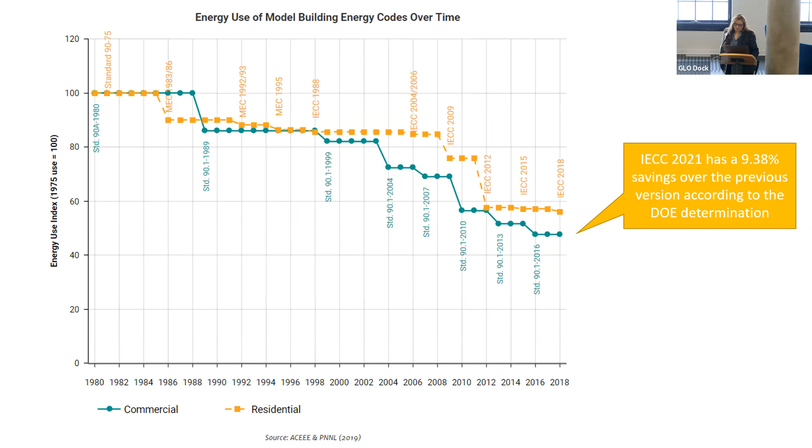Now, ICC, which writes the IECC for both residential and commercial, has published their mission in a document called Leading the Way to Energy Efficiency. And they are looking at developing what they call glide paths to achieve zero energy buildings by 2030. And the way they work this out in their code,

Is it? I can't see what people are seeing, so. Yeah, as long as everybody can see the slides, I'll work with it. I don't have too much that involves pointers, so.

Zero energy by 2030. And the way they do that is they have a base code and then they have appendices that localities can adopt that have higher energy efficiency. They're more stringent than the base code, and we got the first one that was aimed at getting buildings to net zero as an appendix in the 2021 code. And it's not perfect, and we've got some proposals to change it,

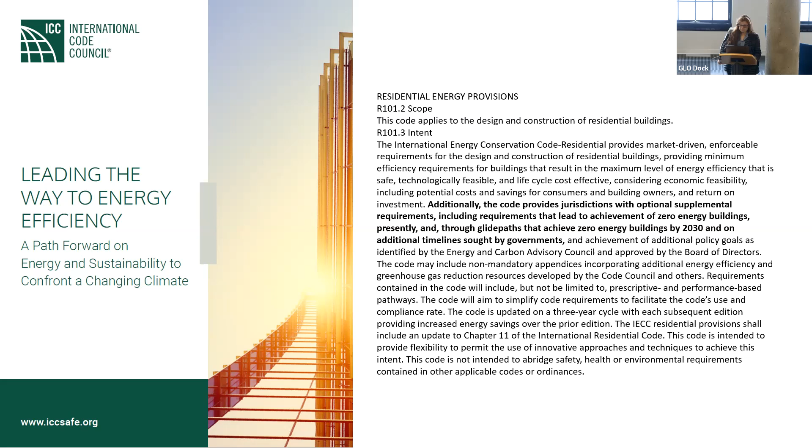but the idea is they're trying to put this minimum code in that they can get agreed upon across the industry and get industry consensus on, which is very difficult. And then they have these additional proposals that overlay on it and fit well with it, and that's why they're written in that appendix form, but they're optional for adoption. So it can be a little complicated, but they are there.

So I'm going to move to what ASHRAE did, and I was chairing the committee through a large part of this development with the 90.2. And as I said, the 2007 version of 90.2 was little used. I think it had 1 or 2 adoptions, but it wasn't really used. I don't think it was even almost at the minimum code level. It had basically been ignored for several years.

And we got to the point where we had to figure out what was the purpose of having it there, because it wasn't being adopted. You had the IECC, that was the federal minimum for residential. What should we do with this? And so ASHRAE actually commissioned a standards advisory panel to look at what we would propose to do. And they put out a report within ASHRAE, but it's public, in November of 2011.

And this gives you an idea of the timeline it takes to develop one of these things. We're working on a passive building standard now, working on higher performance things, and we need to work on them now. We're only 8 years away from 2030, and we are not ready as an industry. ASHRAE is doing a great job from their part, but the industry isn't ready. And so the recommendations of that panel report are written in this paragraph.

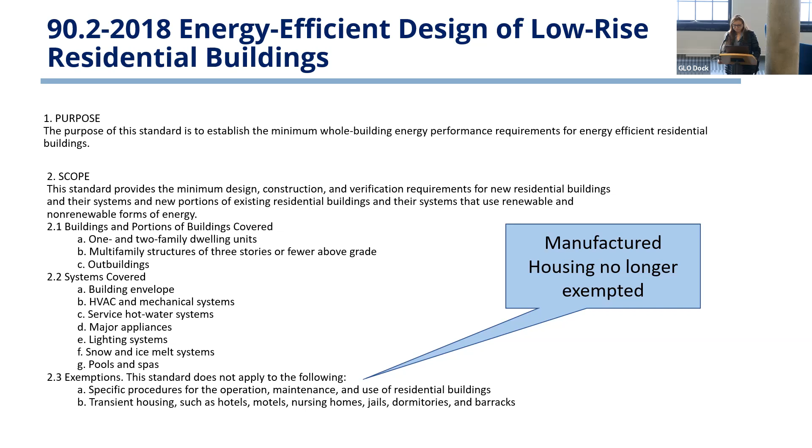Okay, so getting to what's in the meat of the standard. Basically, it's a performance standard. It's based on an ERI pathway, Energy Rating Index pathway, which is very similar to a HERS rating index pathway. There's an ERI path starting in the 2015 code. It does do a version of an energy rating pathway. There are some prescriptive backstops and requirements overlaid on that ERI pathway, but these are only basically to guide that, when you have an energy rating index pathway and you just have one number, there are trade-offs you can make, and we want to guide people into making smart trade-offs. And that's what those are in there.

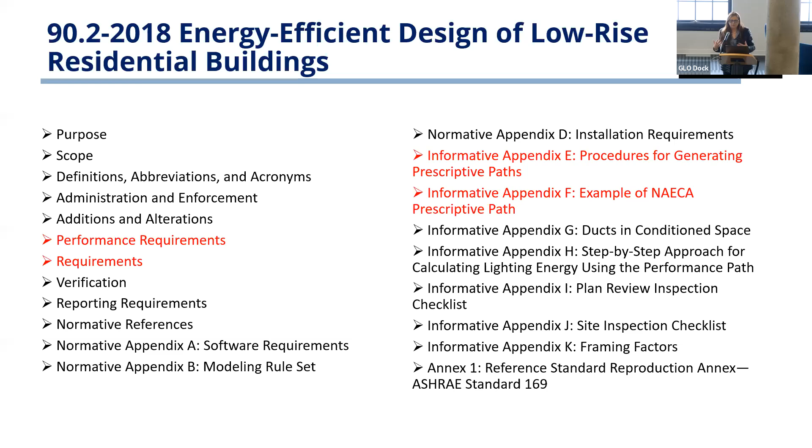So specifically, it does have numbers that are at a level that are 50% more than the 2006 IECC. And I'll show you some of the validation we did on that. It is based on an energy rating index, which is the ASHRAE RESNET ICC Standard 301. And these were the addenda that were in there. We've updated this, you always have to update your reference standards, but when it first came out, this is what it was based on. There are some modifications to the rule set in the ERI. Most of them are related to the lighting provisions, because in 90.2 we went with a higher level of lighting efficiency. It was more aligned with Title 24 in California, which was advanced.

No, it's actually, I'll show you the actual, it's a number, it's like a HERS rating. There was an energy rating index put into the 2015 IECC. It was revised, it actually got lowered. The efficiency levels actually got lowered in 2018. And then in 2021, they sort of went back to where they were in 2015. The numbers in 90.2 are basically the same as in the IECC appendix on pathway to net zero buildings. So they are in the low to mid 40s.

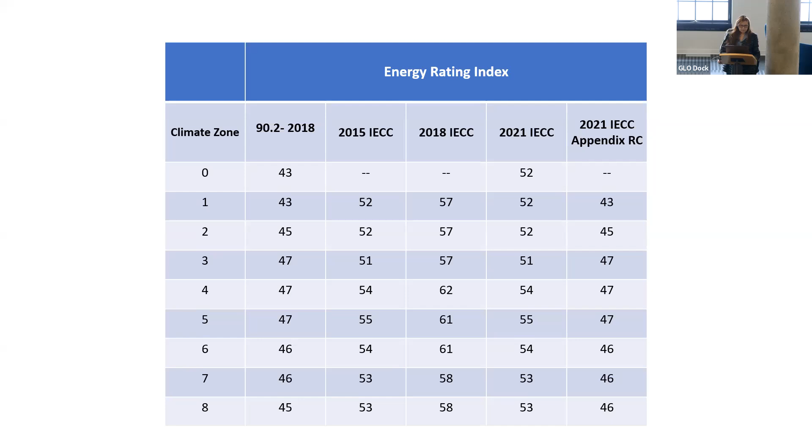So I said there were some overlay prescriptive requirements and backstops. There are minimum building insulation and air leakage performance. There's verification of installation of insulation and verified air leakage, and there's a number of reference standards to do that in there. So not only do you have a backstop, you can't go below a certain level, even though you can in the ERI

calculations, so we put in some minimum backstops, but you also have to verify that what you put into the building is what you designed in the building to get the ERI pathway. And the level of verification is well above what is in the IECC.

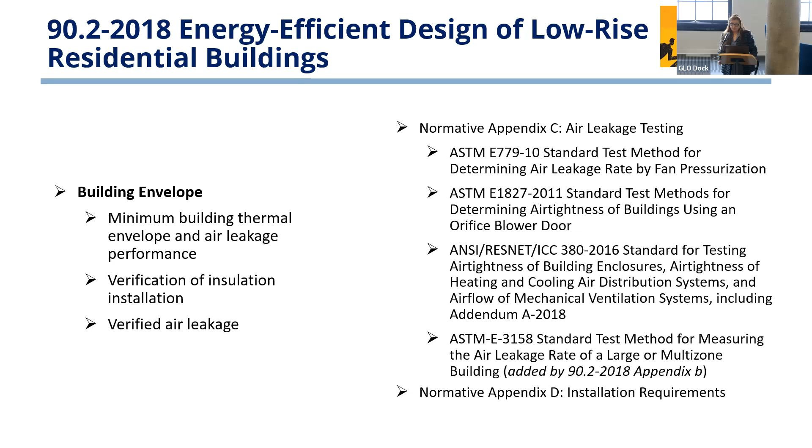For mechanical systems, again, it's mainly about verification with duct testing, mandated duct testing, sizing and verification of the duct system performance, and requirements for design, installation, commissioning, verification, including duct air leakage, and all ductwork is within conditioned space. There is an allowance to do buried ducts in the attics, which can be controversial as to whether those are really in the conditioned space.

And there's an informative appendix on designing ducts in conditioned space and how you do that, potentially along with buried ducts. But the idea is that you want ductwork in the conditioned area. You do not want ductwork running through an unconditioned attic.

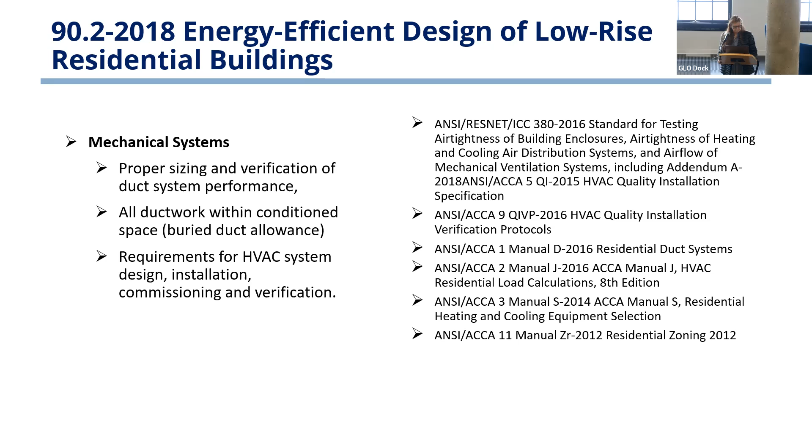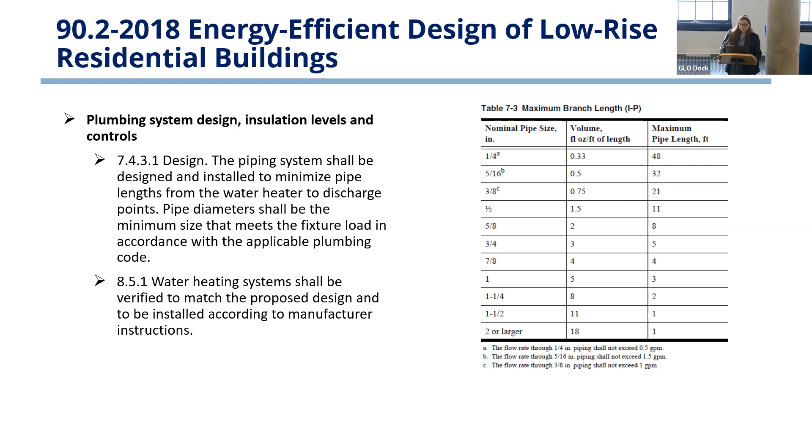There is plumbing system design required. The idea is to minimize the water that is kept in the plumbing system. I know this is part of Passive House as well. And again, verification that what you've put in has actually happened. So the difference between a certification program and the basic energy code is quite often there isn't verification other than a plan review that goes on with the energy code.

Indoor environmental quality, we addressed slightly. We basically referenced other ASHRAE standards for comfort and for indoor environmental quality. And the idea was you need to meet those standards, and however you met those standards, you need to include that energy in your ERI rating. So we didn't necessarily plow new ground on what you need to do for indoor environmental quality, but did address adding that into the energy budget of the house.

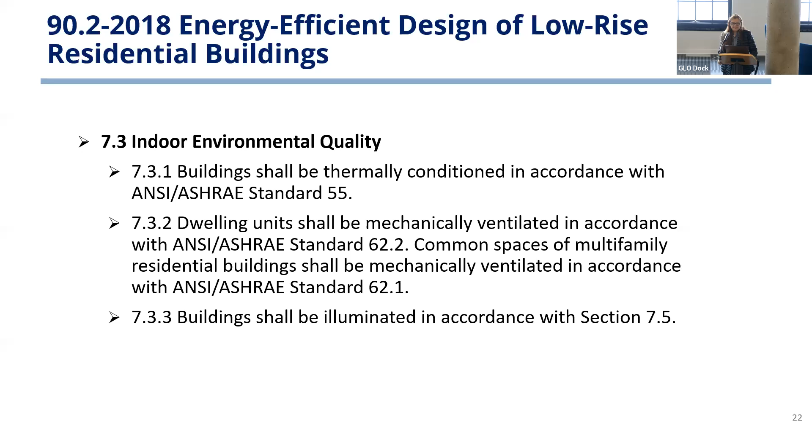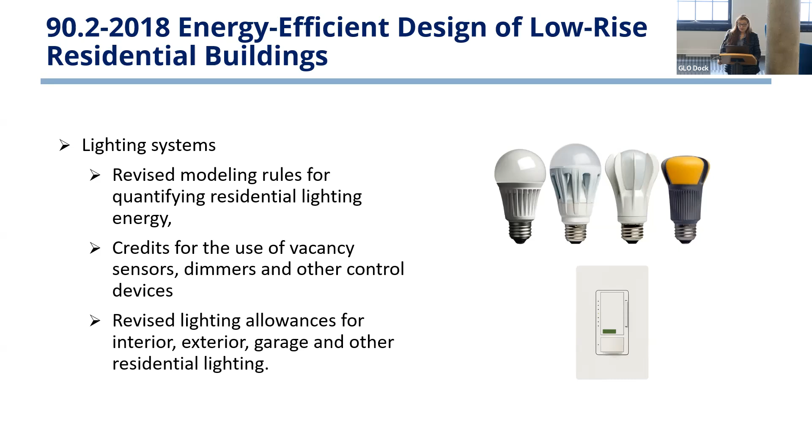Lighting systems, again, it was very much built on work that had been done with Title 24 in California: revised modeling rules, credits for vacancy sensors, dimmers, and other control devices, and revised lighting allowances for all of the residential end uses. And it does go to high efficiency lighting systems and controls.

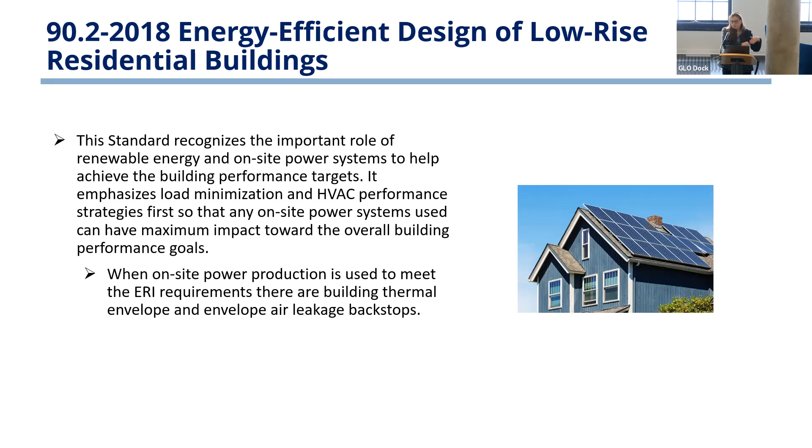And finally, you are allowed to reduce your ERI score based on using on-site power. Now, when you go to the net zero energy appendix, which has the same ERI score numbers as 90.2, you have to get to those numbers without using on-site power. So for the straight 90.2, you can use on-site power to get there. If you were using 90.2 to meet that appendix, you would have to meet those numbers without using on-site power and then add on-site power onto that index.

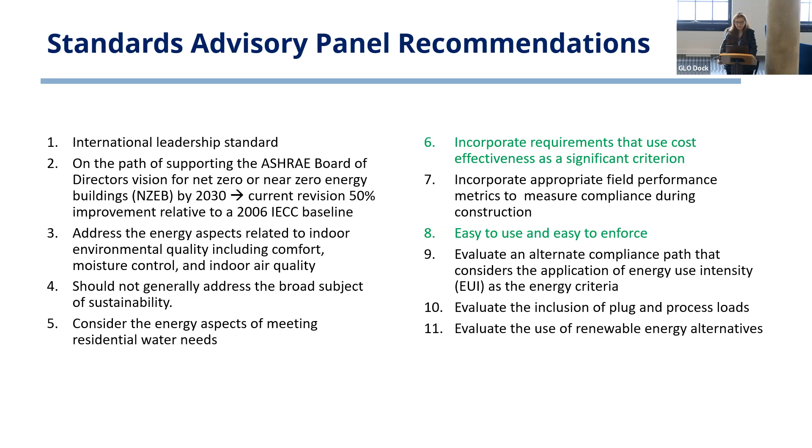So I'm going to talk a little bit more, I'm going to try to get through this, on how we have evaluated cost effectiveness, which was done a little bit differently than the IECC does, and talk a little bit about the ease of use and easy to enforce aspect of it, and what decisions we made based on that criteria.

So first of all, cost effectiveness was based on the philosophy that you want the most energy savings you can get while still being cost effective. So we used a 30-year life cycle cost analysis. We used particular economic and energy prices and energy multipliers in the calculations. And it was based on a whole home life cycle cost analysis that included all of the provisions.

When cost effectiveness is evaluated for code changes, generally it's by measure. So if you change an insulation level, you have to show that that is cost effective, not that the whole building is cost effective. And so we view that these things play off each other.

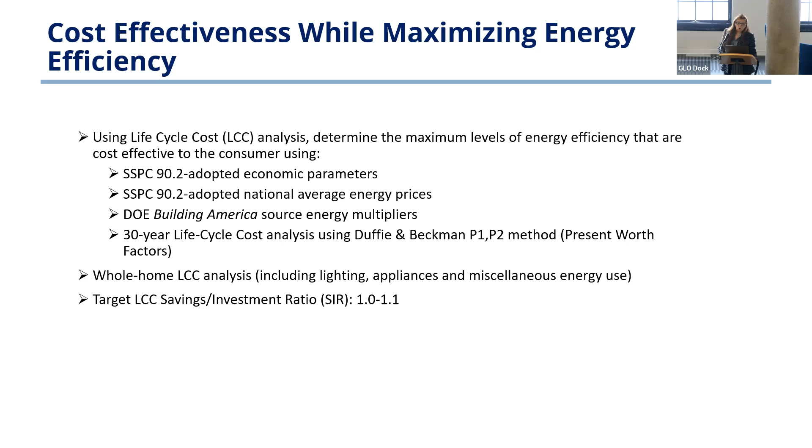And that is a different aspect than is sometimes used in some of the cost effectiveness statements that are provided to energy codes. And everything you do with a change in an energy code has to be validated with cost effectiveness if it's to, say, the IECC. So we evaluated two options. We evaluated a design using NAECA minimum heating and cooling hot water equipment that included on-site power production. And then we looked at using higher efficiency equipment without on-site power. Both of these had higher building envelope components added to them.

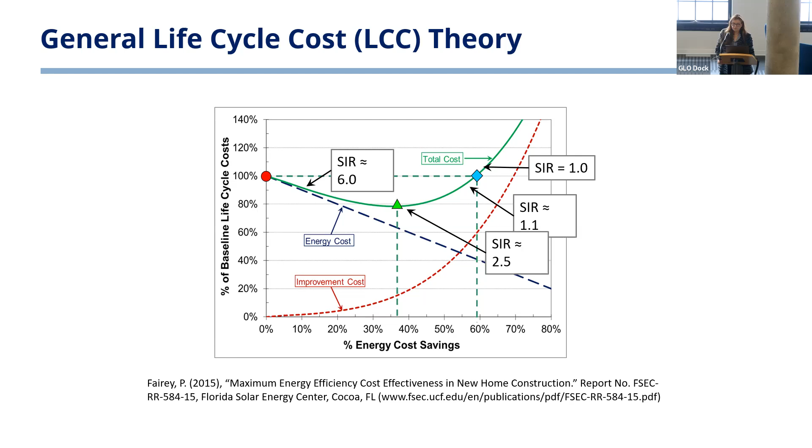Both options had building envelopes that exceeded some of the 2015 IECC requirements. And we wanted to get energy cost savings 50% over the 90.2 reference design. And these are where we came out with those, and then the proposed numbers came out of sort of an average of the two pathways that we analyzed. And this paper that's written down at the bottom has the details of all of the cost effectiveness evaluations and savings. If you wanted to look into that more, I can provide the link or the reference.

On easy to enforce, that was part of the reason we chose to go with the ERI pathway. The ERI pathway is in the IECC, and there is a compliance specialist designation between HERS and IECC that basically allows HERS raters to be sort of supplemental energy inspectors for using that ERI pathway. Why is this important? Well, if you look at the survey that was done by a combination of National Institute of Building Science and ICC on the code officials, and this was done in 2014, at that time there was a huge number of code officials that were planning on retiring in 5 years.

They probably already retired. We have a shortage of code officials. We've got budget considerations at a lot of local municipalities and jurisdictions. They're not hiring new code officials. They're overworked. And the thing that gets left out a lot of the times is specialists in energy in terms of inspections. And so having a pathway that can be inspected and verified by an existing workforce is really important in terms of the ease of enforcement and the ability to enforce a code.

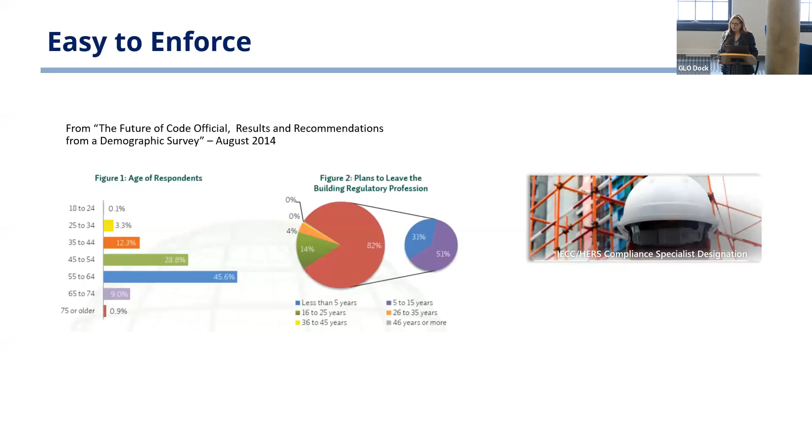I think that's something that you need to look at because the ability for jurisdictions to inspect on energy codes is at a crisis level. There just aren't enough people who are trained to do it. And I suspect the ICC would do more of these MOUs to get these cross-industry specialists to do these inspections.

So in conclusion, in terms of the development, we met all of the recommendations, at least to some extent. I did mention energy use intensity as the method we should evaluate. We did evaluate it. We did not use EUI numbers specifically, primarily because the ERI was more able to be enforced in the industry, and that was the consideration. But we met all of the standards, maybe not them all 100%, but we went at least 80% on all of the recommendations that came out of the panel.

And I just want to look at where the committee is going now. We have put in a proposal to the current code cycle to replace the current net zero energy residential building provision.

They just have the table with the ERI pathway, but they don't have the other benefits that 90.2 provides in terms of verification and being a turnkey on how to manage that ERI pathway. So we've made a proposal to replace just the table with using 90.2 to strengthen the appendix for net zero buildings. It would still be based on achieving those numbers without on-site power and then adding on-site power to them to get to net zero energy.

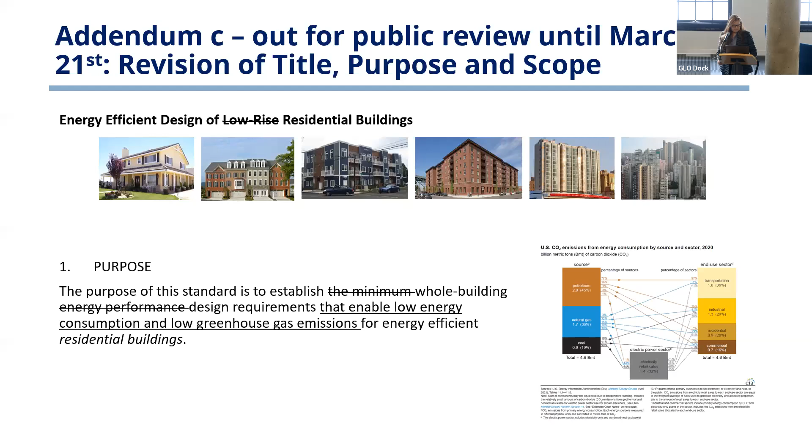And also, there's some other things to specifically cover renewable energy systems more directly in the standard. And we also want to get to connected or algorithmic control. So connected thermostats, smart thermostats, putting those in there, and the energy efficiency benefits you can get from them. So that is out for another 5 days for public comment. I looked at it about 3 days ago, and we already had 30 public comments. Usually you get at least 2/3 of your public comments in the last week. So I'm thinking we're going to have probably 90 to 100 public comments on what we proposed.

Some of them are positive, and some of them are, we don't like what you're doing, you should change the number, everybody's confused by it. There's a whole lot of different comments coming in. The committee really wants to get feedback on how we do this. We do want to have all residential occupancy under the same banner, under the same standard, but we need to make sure that we're doing it in a way that supports the overall community.

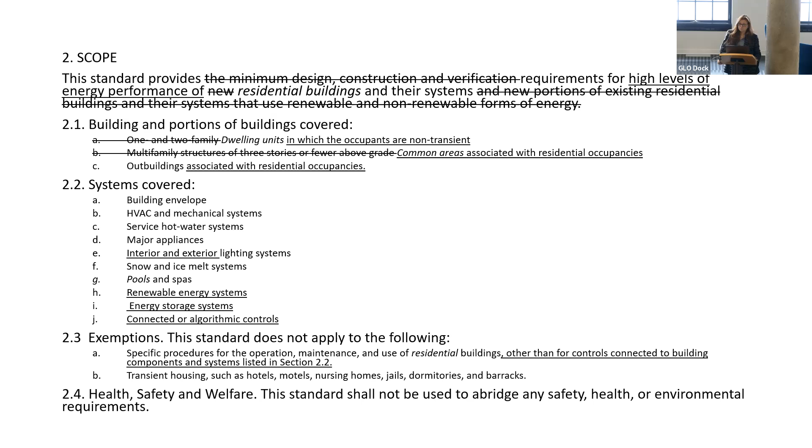So I'll just close. They talked about this being a leadership standard, and just summarizing what a leadership standard is, it's on the pathway to net zero energy. It includes the energy aspects of indoor environmental quality, related plug loads, on-site energy, and it has to also address implementation in terms of the benefit, cost, the validation, and ease of adoption.